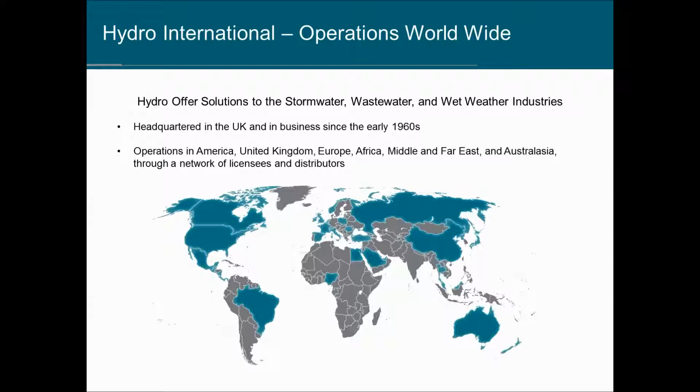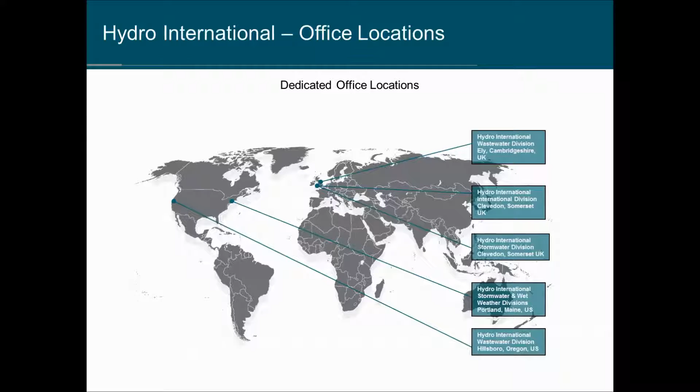Hydro International is a small company that works throughout the world in various locations, providing stormwater and wastewater solutions. Headquartered in the UK, listed on the London Stock Exchange. North American operations are based out of Hillsboro on the East Coast and on the West Coast, and Portland on the East Coast, and the stormwater is all handled out of the East Coast office. We also have a stormwater engineer based on the West Coast to provide time zone coverage.

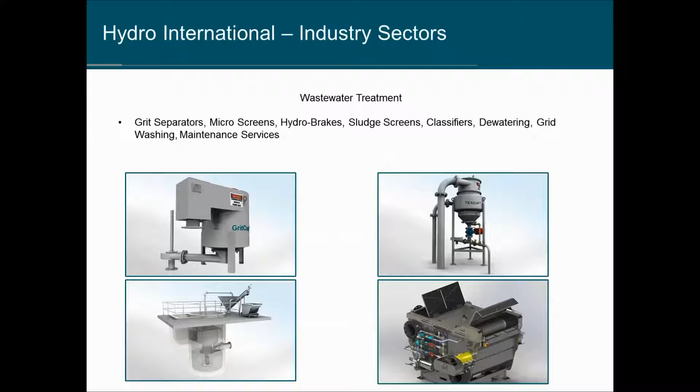We cover 3 main industrial sectors: wastewater treatment, wet weather flow, and stormwater treatment. The stormwater treatment is where I concentrate my efforts, where we have the Downstream Defender, the First Defense, the Hydro DryScreen and the Upflow Filter. We also supply vortex flow control valves as well.

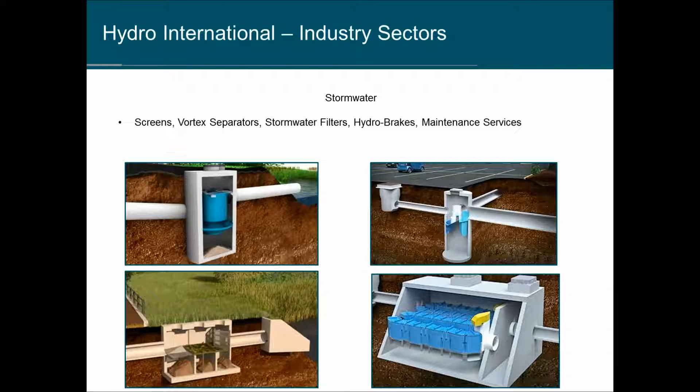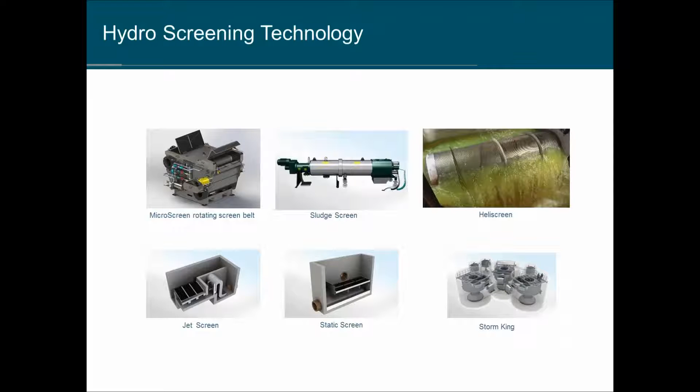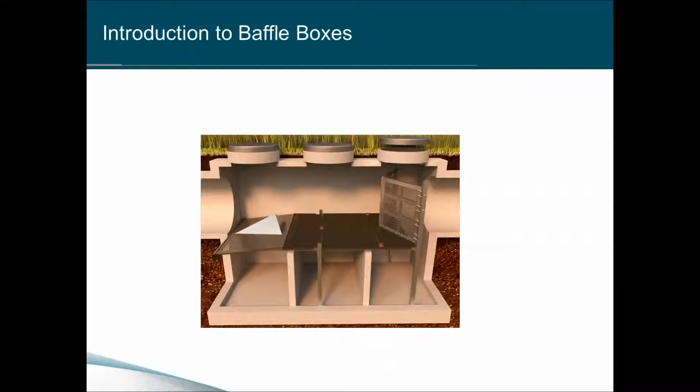Screening technology - we have a range of technologies across our businesses. They're all similar. The development of the Hydro DryScreen really is a new development for us, but screening is not a new development. So if we want to look at baffle boxes in general, we looked at the industry and looked at what was available, and generally what we find is that you get a Type 1 baffle box. This is a simple baffle box, usually just either a simple chamber or vault, and it might have 1 or 2, maybe 3 chambers in it, separated by vertical baffles within the vault.

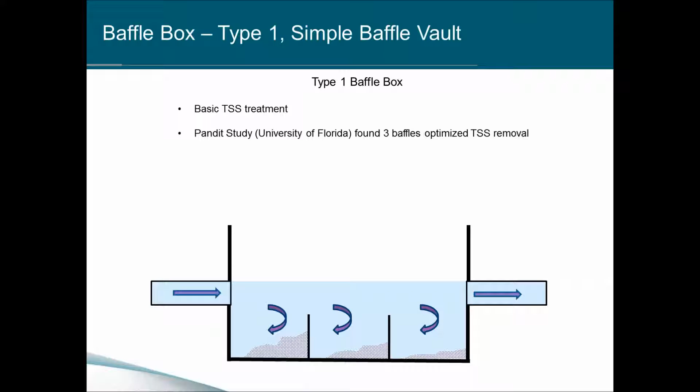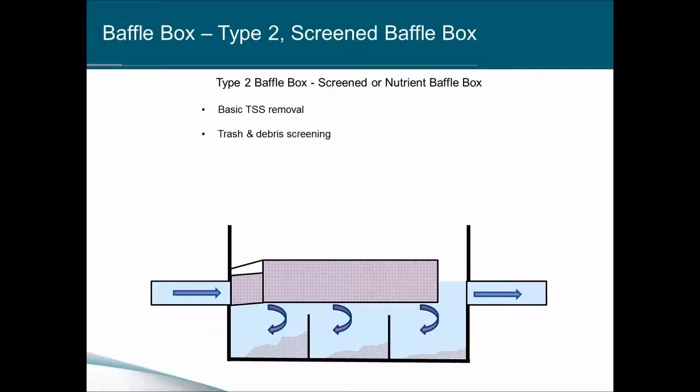Professor Pandit down at the University of Florida did some testing of different designs of baffle boxes, and he found that if you have 2 baffles and 3 chambers about the same size, that's about the optimum design. You don't really get any benefit from changing that design - adding an extra baffle doesn't help, taking a baffle away doesn't help. So 3 baffles is about where you want to be. Then adding a screen or basket on top helps remove debris and trash and improves it to what we call a Type 2 screen baffle box. Some refer to it as a nutrient baffle box.

So where do these fit in the toolbox of engineering tools for treating and cleaning up stormwater? If we're talking sediment removal, you have filters - they're the optimum product, they'll clean the smallest amount of sediment out, although filters themselves tend to be load sensitive and can be overwhelmed by high concentrations. Separators sit in the middle somewhere - they remove around 50 microns for that coarse to fine sand, maybe even some coarse silts, but they don't do so well for maybe neutrally buoyant material. Baffle boxes aren't so good on sediments - 500 microns, maybe coarse sands and larger - but they do pretty well with things like neutrally buoyant material and screening out trash and litter.

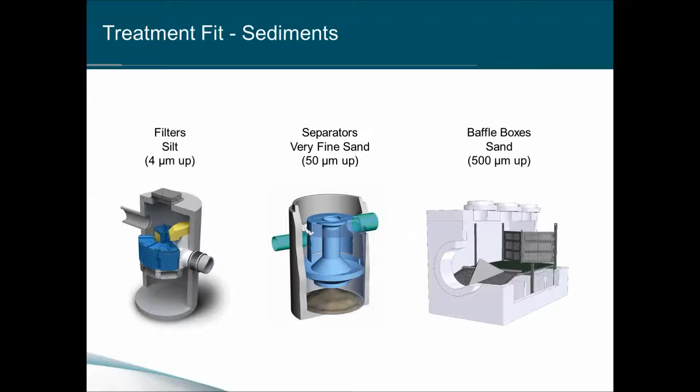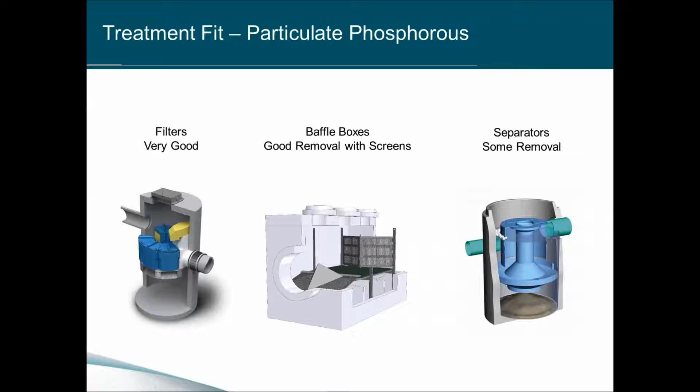If we look at phosphorus, particulate phosphorus - the solid bits that contain phosphorus - filters again are very good, although again load sensitive. Baffle boxes now do a better job because they tend to remove a lot of trash and organic debris, so if you're looking at leaf load with associated phosphorus loads, they can actually do quite a good job. With separators, it's less likely because they tend to wash through a lot of that material.

Here's a photo I took down in Kentucky. I took this while riding along the Legacy Trail, along Cane Creek or Cane Run down in Kentucky near Lexington. This really struck me as to why we want a baffle box with a screen in it, because a lot of that material - when I looked at Google Maps and measured the distance just out of interest, my wife looks at me strangely when I'm riding along and I stop and take photos of trash and creeks and stuff.

The nearest outfall to this runs through farmland, through horse parks. The nearest outfall was the Interstate 75, which was a mile away, and the nearest residential area was another mile further upstream. So this trash has traveled at least 2 miles, probably from the nearest residential area, a mile from the highway.

And if this is typical of what's in the stream, there's a tremendous trash load going into the stream. So for treatment and protection of lakes, rivers, and beaches, LID practices, this is where the baffle box really shines and what it should be used for and why we should be using them. This is clearly getting through whatever protection is available upstream.

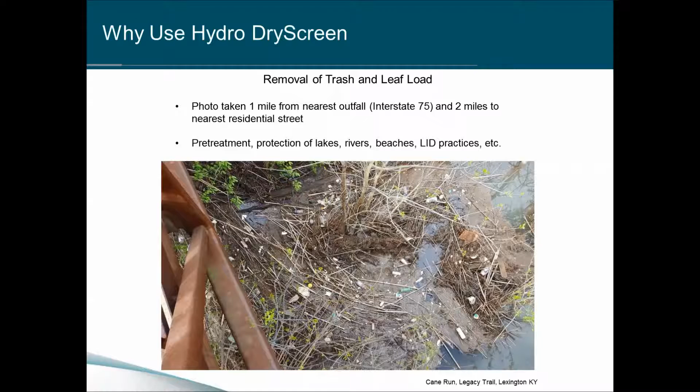The other side to look at is organic load. Even though a tremendous amount of load may be picked up through street sweeping, what I find if I look down my street—I live in Wisconsin, and in the fall everyone starts raking things into the street around October, November. For some reason, that time of year it also rains and blows a lot. So before the city can pick up anything, a lot of material is washed into the storm sewers, and that's where an end-of-pipe screening system that can handle a large flow is a really useful backup to a street sweeping program.

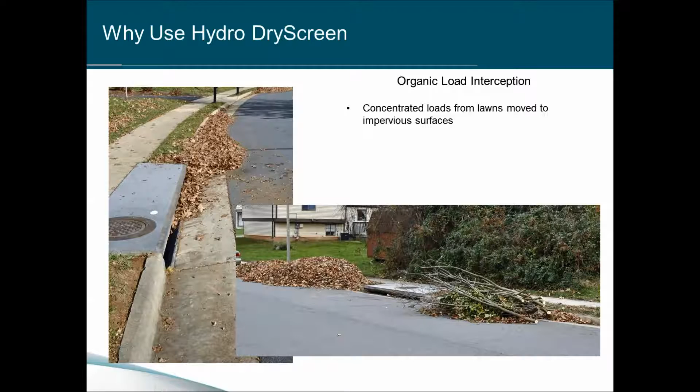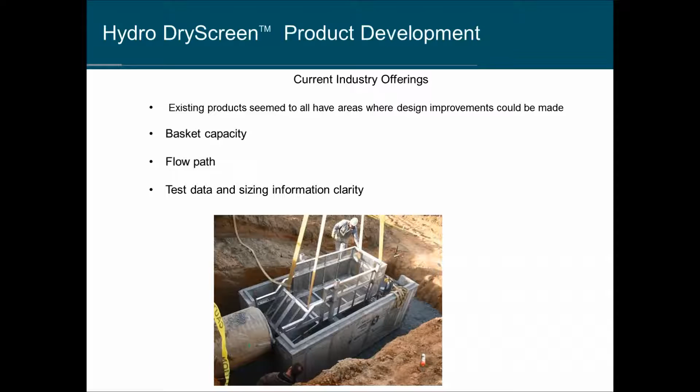In developing this product, it was important to look at what's available in the industry. When we started looking, we didn't find a lot of really good stuff. We saw some development of baffle boxes, but when we looked at them, some don't really optimize their screening area, they don't control the flow that well, there's very little test data available, and the sizing tables aren't making a lot of sense to us.

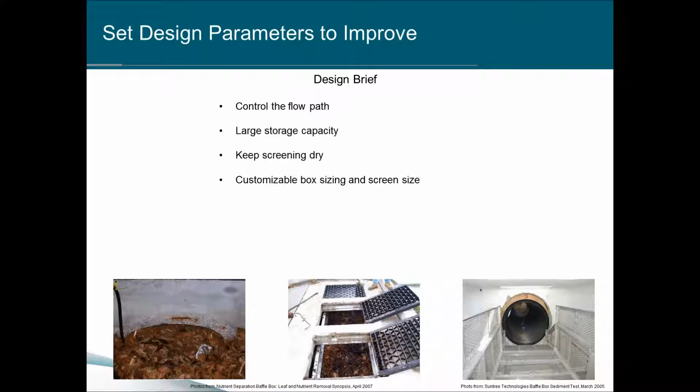So we set some design parameters and started looking at how to improve things. We wanted to control the flow path, maximize the screening capacity, keep the screenings dry, and provide tools and sizing information that makes sense to an engineer.

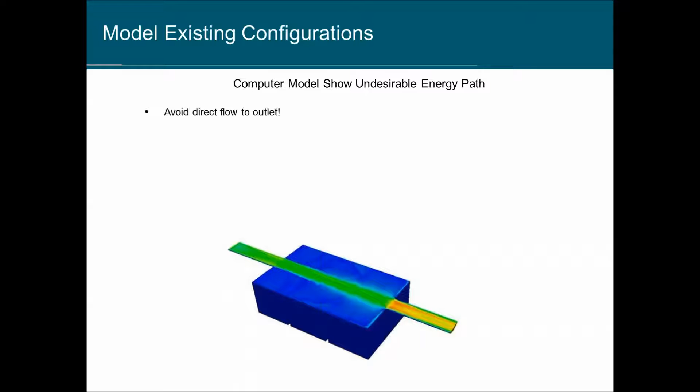When we first started modeling these—and this is pond design 101, really—you don't want your inlet lined up with your outlet with a plug flow going straight through. It doesn't optimize the design of a baffle box, and it puts a lot of energy into the basket where the material you're trying to capture is sitting. You don't want to start hammering it with high flows.

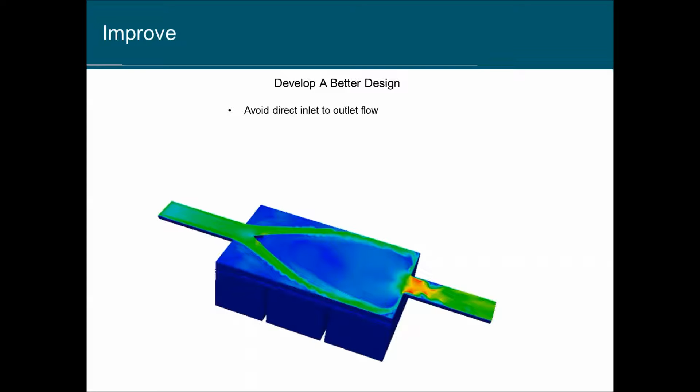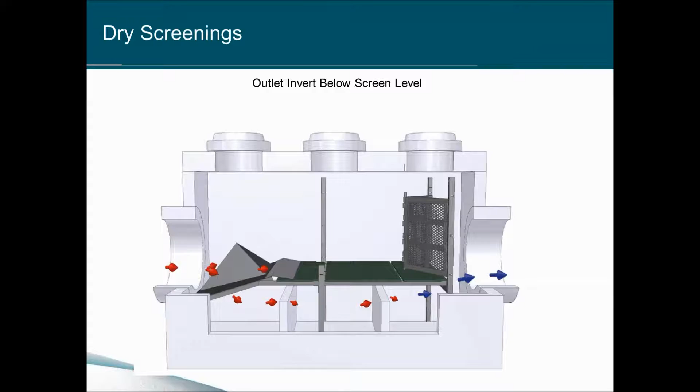So our solution was to split the flow and direct it to the sides so we didn't get direct flow from inlet to outlet—that's how we developed our baffle box. To maximize screening, we made sure the screens went from wall to wall, front to back, and put a flow splitter in there. That's the area we worked on to develop an improved baffle box system. Then we built this model.

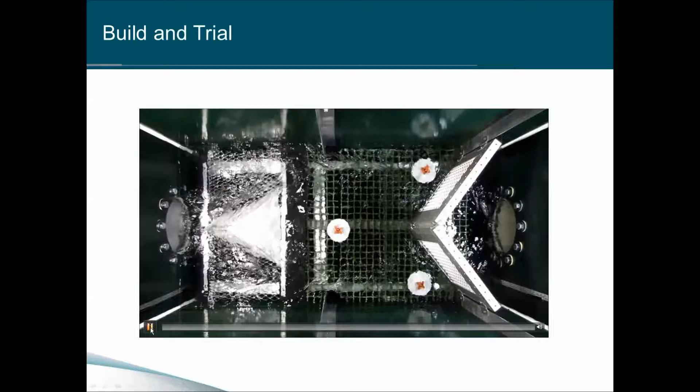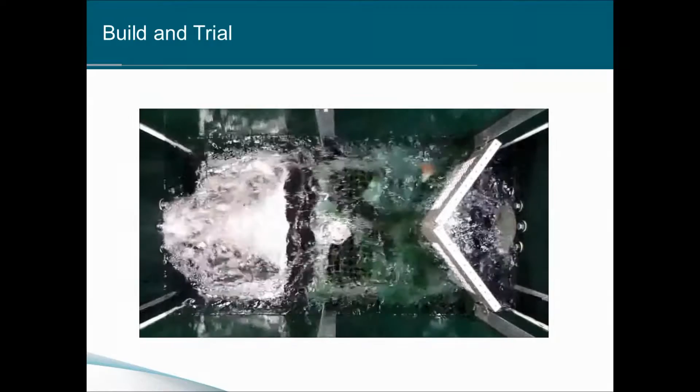This is a 3x6 model. Once you do your modeling, you want to do some testing and see if the test results reflect the modeling. When you see that reflection—that the testing and modeling start to line up—you get a better feel that what you're doing is along the right track.

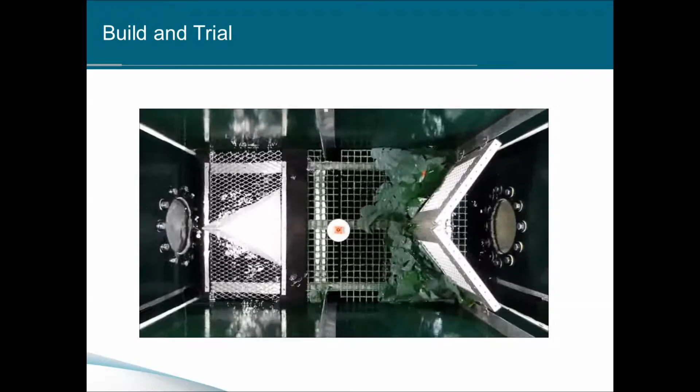Once you've got your model built, you start looking at testing as well, because people want test data. We looked at what was available in lab testing. Most testing on baffle boxes uses a fairly coarse particle size gradation. Very little testing is done in the finer range below about 100 microns.

And that makes sense because these are not high TSS removal devices—they're lower quality TSS removal. They're more screening devices. But having said that, they're sized basically on TSS, so we need that information.

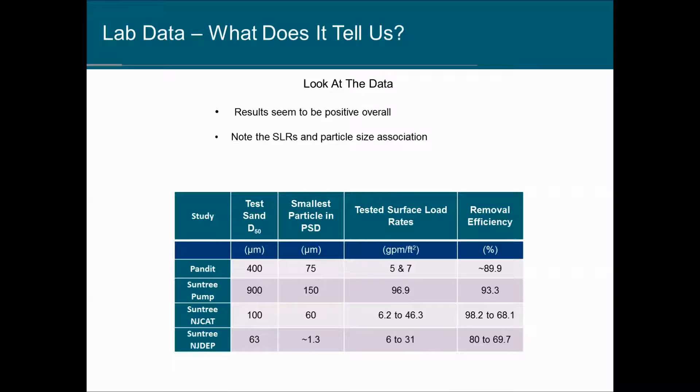Now, the field data that we could find really showed there was a lot of variability in field testing. Field testing is so hard to control that you expect variability, so we really couldn't get much indication about field test performance. So basically we just ignored that.

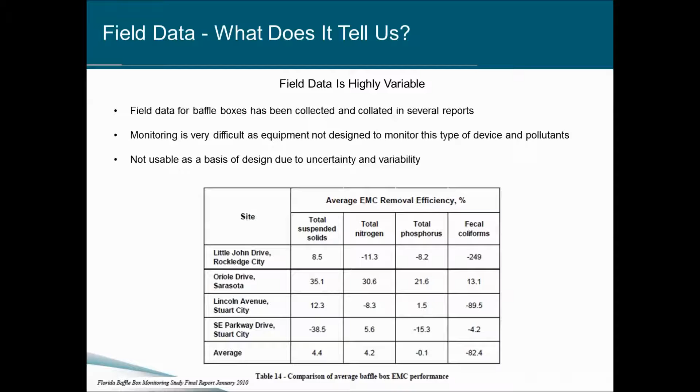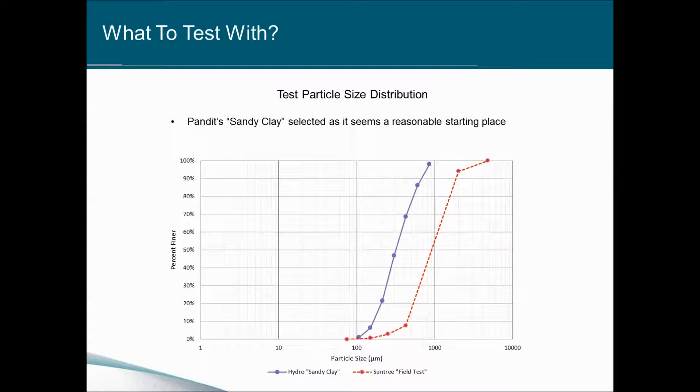In testing these units, we looked at the particle size gradation that was being used by Dr. Pandit, and some of the gradations used by other vendors, and we settled on this Pandit blend—we called it the Hydro Sandy Clay, really Dr. Pandit's Sandy Clay. It was the finer blend he mixed up, and we did similar testing so we had some idea of where we were heading.

We also subsetted that particle size, so we knew what subset grades we had—from 1,000 microns down to 425, and 1,000 down to 300—so we knew how much we were putting in, and could measure how much of each subset we were removing in our testing.

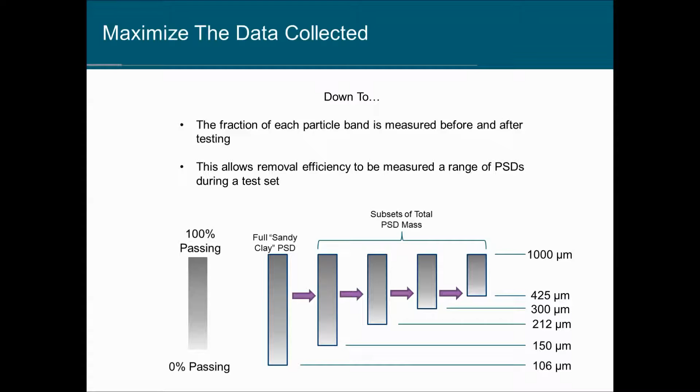That means that if an engineer is working on a site that's pretty coarse material, mainly coarse sands, maybe some fine gravels, they could design with something down to 425 or 300 micron. But if you're working on an industrial site with more heavy equipment running around, you might be getting material ground up to a finer particle size, so you'd select down to 106 microns as the smallest particle size targeted. That's generally what we find in these devices, so we have that range of particle sizes to design with.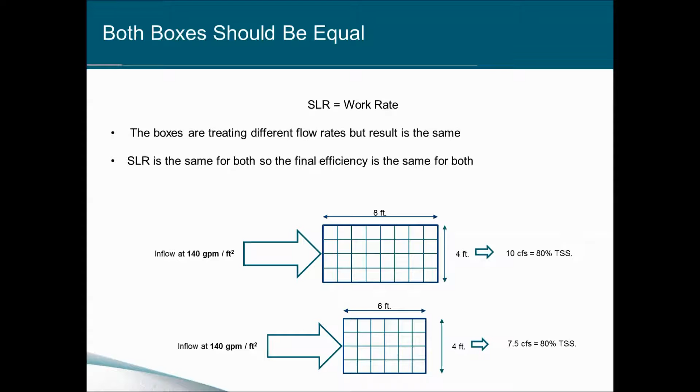The other side is that, as mentioned before, baffle boxes are kind of miniature settling ponds, so their design is based on a similar principle: a load rate, gallons per minute per square foot. If you have the same load rate between two boxes, the difference is the flow rate. So in my top example of a 4x8 box, 32 square feet, loaded at 140 gallons per minute per square foot, you'd have 10 CFS of treatment. A smaller 4x6 box loaded at the same load rate would have 7.5 CFS of treatment, but both would be removing the same amount of material, say 80% TSS, just for example.

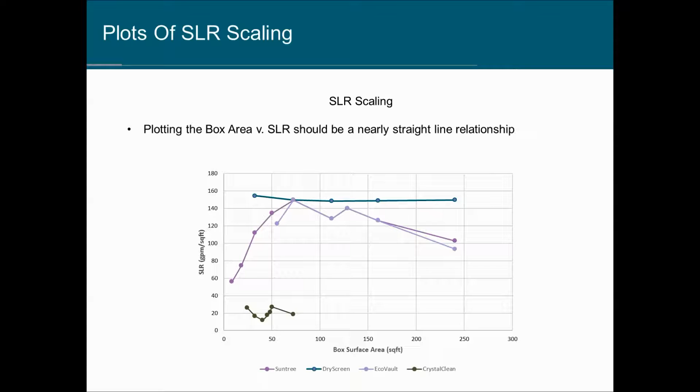This is where things got a little startling when we looked at some vendors' test data. We found the load rates between different devices, for the same removal and same particle size, weren't consistent—they varied significantly from very low to very high. This is the same box removing the same particle size for the same removal efficiency, just different size boxes. They should all have consistent load rates. We settled on a consistent load rate scaling, which is the standard in the industry, but we're finding the load rate scaling between smaller and larger units on a lot of these vendors is variable, considerably variable, which is a bit of a red flag. We don't know why exactly, but it does show maybe some inexperience or lack of understanding on how these things work. So it's just a bit of a red flag we saw.

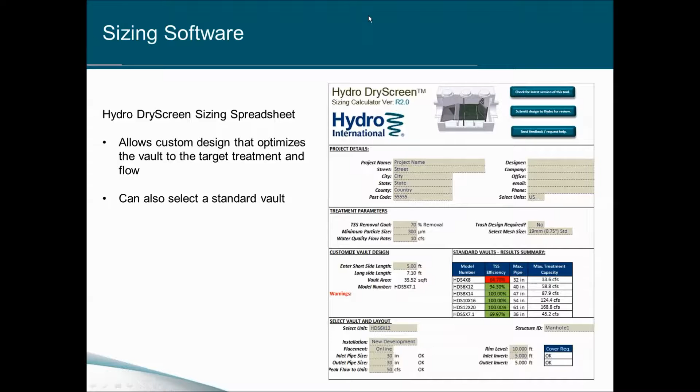So we put all that information, threw it into a sizing spreadsheet. I'm just going to go through that sizing spreadsheet now for you. Let me switch what I'm presenting here, just one second.

The tool's a simple spreadsheet, so it doesn't require macros or anything to run. You don't have to beg permission from your IT administrator to load up any software—you can just download it and start using it.

The top box is fairly self-explanatory—just all the project details you want to put in there, and a selection of either metric or US units. There's some little boxes you can check for an update of the spreadsheet; I update it occasionally and put a new version number up, so just click that box and see if you've got the current version. You can submit a design for review—that goes through a submission process, gathers a little information, and you can attach the spreadsheet file itself. You can also just click this box here, which will send me an email, and you can ask me any questions you like on it.

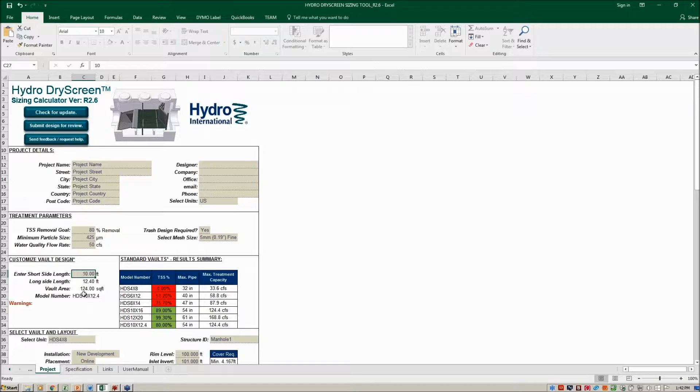Now to select the vault, you go down to the layout area here, and the custom vault is at the bottom of that all the time, or you can select the standard vault. You can then just put in pipe sizes you need. If you put in a pipe that doesn't fit, you'll get a warning. It'll still carry on, but you'll get a message saying you're a little bit oversized there, you might want to revisit the pipe sizes.

And you can put the levels in, and the same thing, it'll give you the minimum cover required, so you can develop a design for your site.

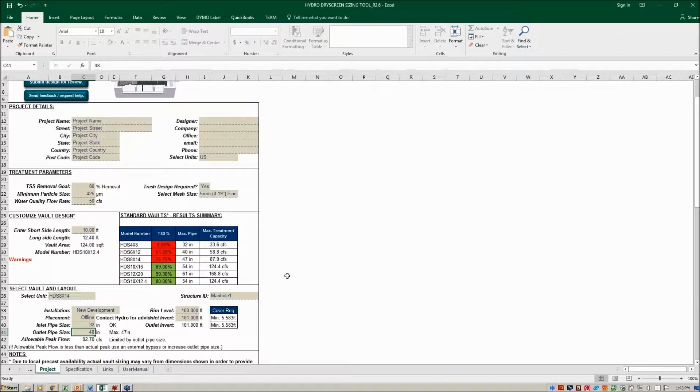And then these are translated into a simple drawing, and that drawing can then be just printed out. You can print this whole thing out, submit it with your design, or put this on your plans.

And the other tabs give you a specification. There's a Word document there you can download and customize. There's a brochure there as well, and some links to some other stuff, and a bit of a user manual on this tool. So that's a simple design tool.

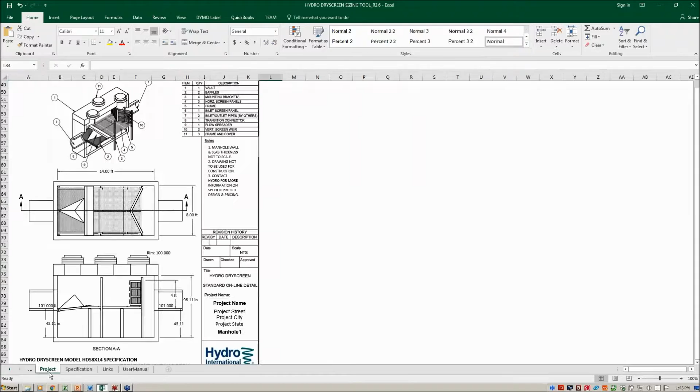It allows you to get a very quick design done. You don't spend a lot of time on it, and you're good to go.

So that's the tool. Maintenance side of things: these are standard vactor truck maintenance. You don't need any special tools, but you may need confined access. There are screens in there that have to be lifted and moved out of the way once you've vacuumed out all the trash, so there's likely a confined access requirement. That's fairly common for most of these stormwater screens.

You'll have multiple lids you can lift, screens that have to be moved out of the way, and then you vac them out. And so we have a maintenance service division which can provide quotes for all this.

Now, some of you are probably wondering, what do these things cost? We're finding that the cost is quite variable throughout the US, because we like to use local precasters to do the vaults. We find that the significant variability is the cost of the precast. So we have to go to local precasters and get a quote basically for every vault.

But we're finding smaller vaults, you might find 4x8, something like that, could vary from 20 to 50,000 depending on the precast. And the larger vaults, maybe a 12x20, could vary from 55 to 150,000. It's that variable depending on local concrete pricing. So we price each one individually, and it doesn't take us too long to do that.

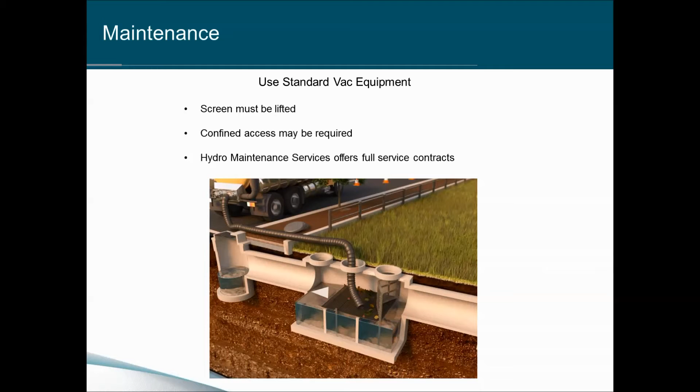So that's the Hydro DryScreen in a nutshell. I apologize that I had to go through that twice and I forgot to turn my microphone on the first time. But I think we're not doing too badly, about 45 minutes.

So the thing to remember about the Hydro DryScreen: we have spent a fair bit of time studying these and understanding the industry and making sure that we have some consistent design. We've done a lot of controlled testing and we've put together a nice design tool for you. We've maximized the basket and kept that basket dry between events.

Large screen area. Now just to let you know, we blinded off these screens 80%. So we put solid covers over 80% of the screens, redid the testing and found hydraulically there was almost no difference in the flow. So as these blind off, you're getting very little drop off in flow. And if you do get significant blinding or covering up of the slots, the back screen is also a bypass weir, so water can weir over that if it needs to.

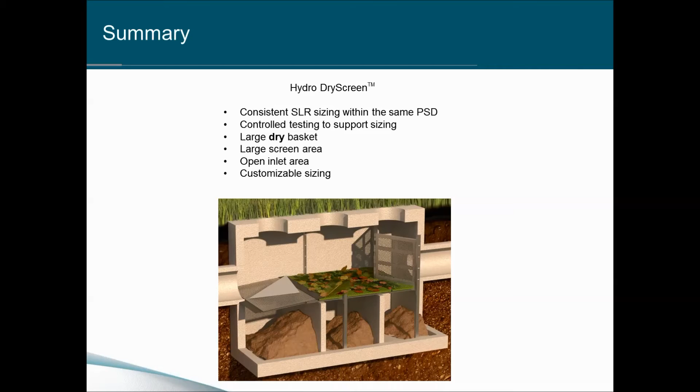We keep a large open area in the front so that we're not blocking the inlet pipe, and you can have customizable designs. If you have any questions, please email me.